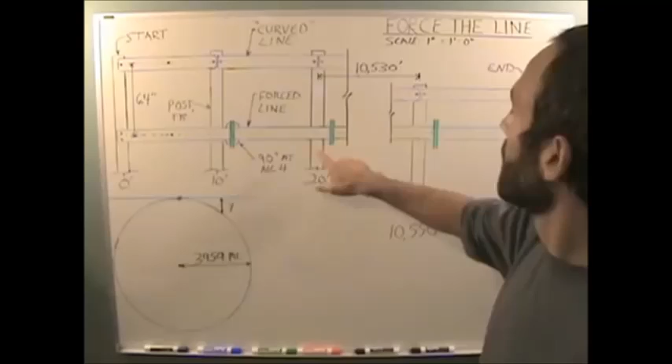So here's what we do. We set posts over a 2-mile stretch of land. What I've got here are my posts, okay? 10 feet on center. Here's your first post, second post at 10 feet, third post at 20 feet, all the way down to 2 miles away. Here's your last post at 10,560 feet, or 2 miles, and your second to last post at 10,550 feet, okay? I've got my break line in here to show that the distance between these 2 posts is 10,530 feet. You see what I've drawn here, okay?

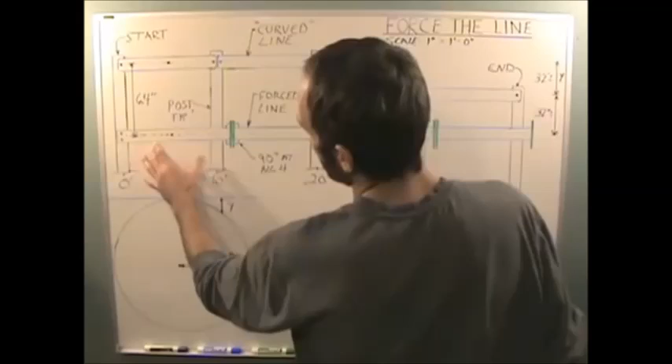Now the idea is, everything is based off the first 2 posts. What we do, we set the posts in a straight line. Very, very easy to do. Contractors can definitely do this.

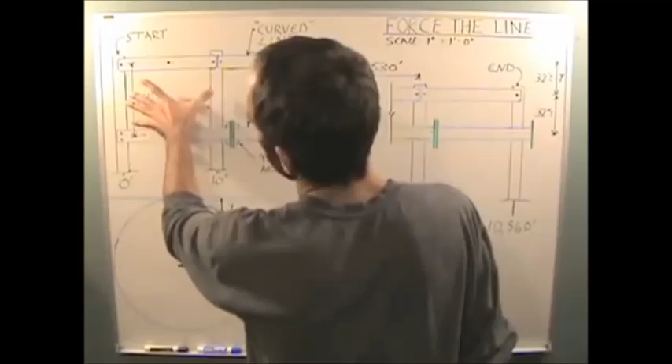And then between the very first 2 posts, we construct a beam between the 2 and level that beam. We level this beam. Make it level. This is typically how beams are constructed. You always level them out, unless there's a roof slope or something. But for a floor beam or something, you would always level it.

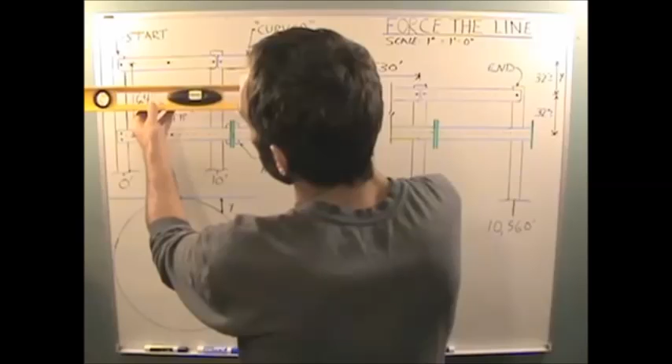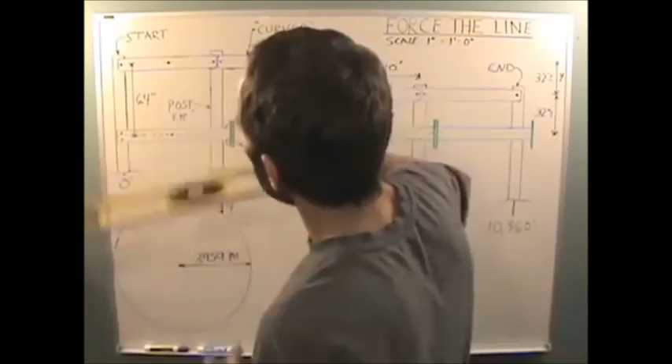Anyway, so this point right here is this point on the Earth, if we live on a convex sphere, okay? Meaning that when this beam is leveled, there is an imaginary line perpendicular to the center of gravity of the Earth, extending this to the center of the Earth. And then we do the same thing all the way to the end.

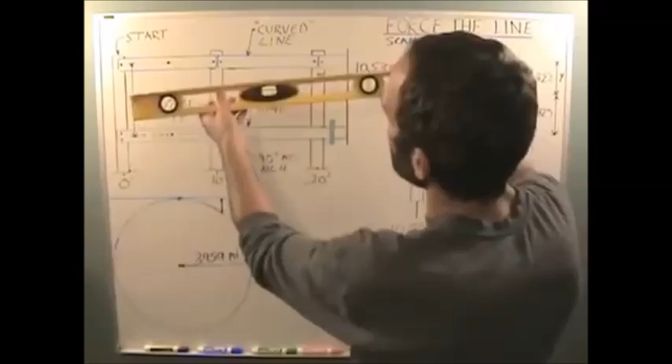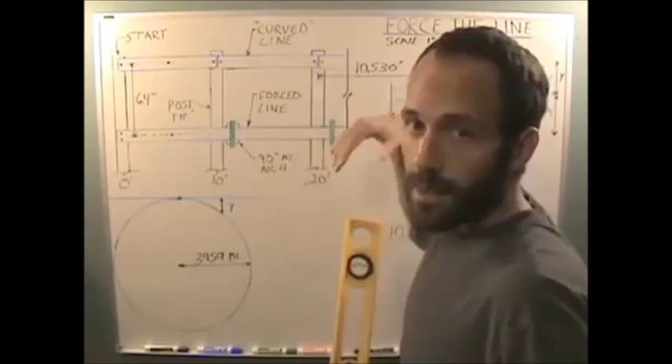We level each one of these beams all the way for 2 miles, okay? So every time you level one of these beams, it should be extending, it should be perpendicular to a line extending to the center of gravity of the Earth. So over 2 miles, those beams will actually follow the curve. They have to. If a level works, the only way it can really work on a sphere is if it works with the center of gravity.

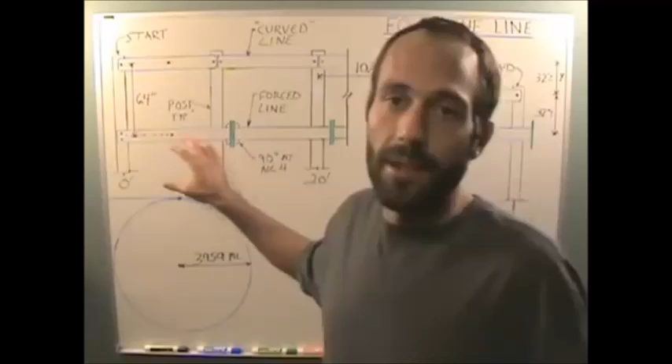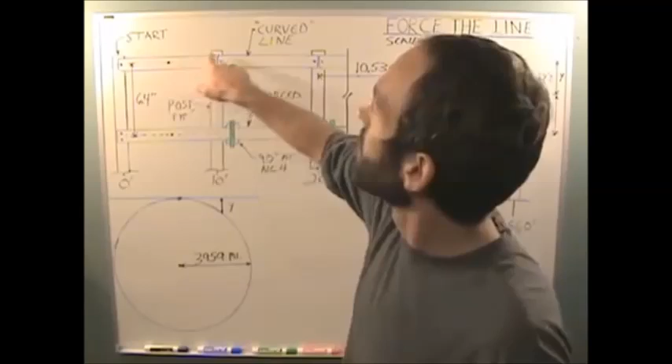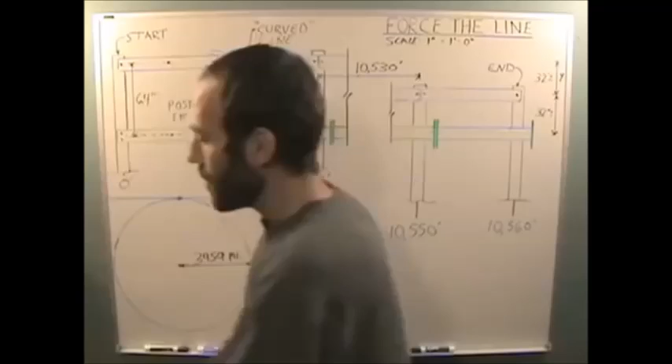Okay? Then, what we do is we use a rectilineator type device below it to force the line. This very first beam we construct right here is perfectly parallel, or as close as we can get to perfectly parallel to this beam. It's leveled too. We level that beam, okay? But then for all of the rest of the beams on the forced line, as I'm calling it, we use a connection here. It forces this beam, it forces a right angle connection to the first beam, okay?

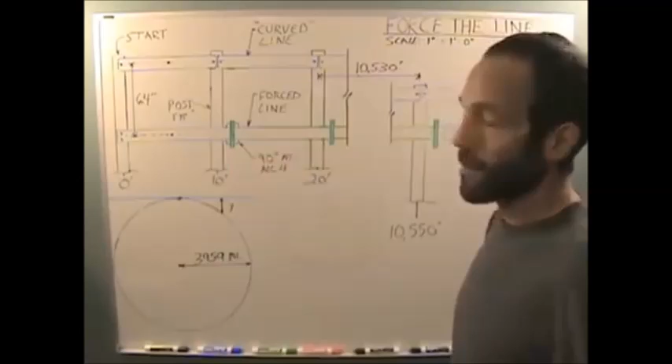So, say this is our first beam, and it's leveled, okay? The next beam that comes in, we use precision machine work, or like a CNC machine or something similar, to create a connection that forces a right angle connection to that first beam. So now, this second beam is not actually level. You wouldn't be able to tell from the naked eye, and if you put a level on it, it would probably still show that it's level because our levels are not that accurate. But it will stay in line with this beam.

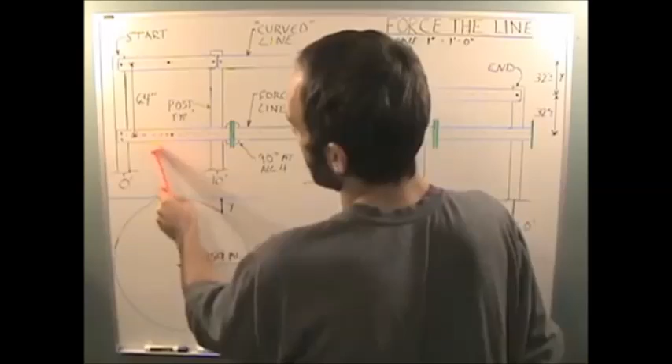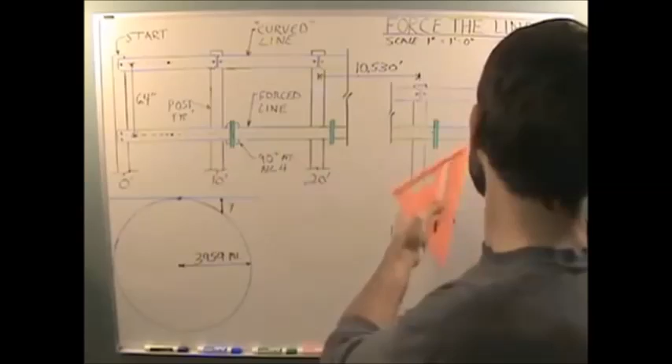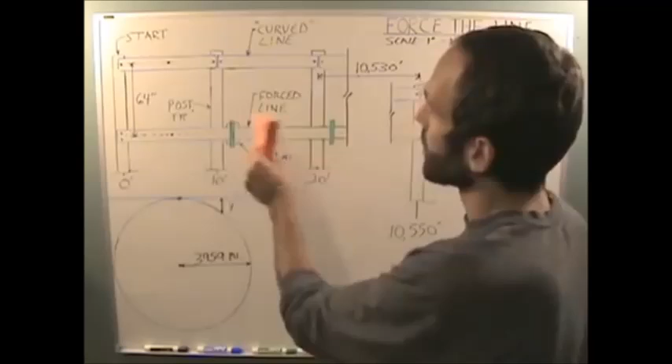And we do that all the way down to the end. Now, we can just use a rectilineator type device. We don't have to build these beams. We don't need 1,057 of these beams on the bottom, because they're going to be expensive to make a right angle connection like this. You see I've got 90 degrees at all 4 corners. We can just leapfrog it and just mark the columns or the posts as we go until we get the line.

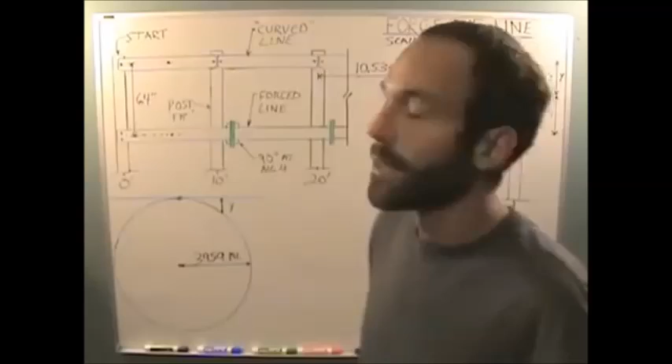Now, if the Earth is a sphere with a circumference of 25,000 miles, then over 2 miles, we should see from this point to this point a drop of roughly 32 inches. You can draw this in AutoCAD and prove it. This is what it has to be if the circumference of our world is 25,000 miles.

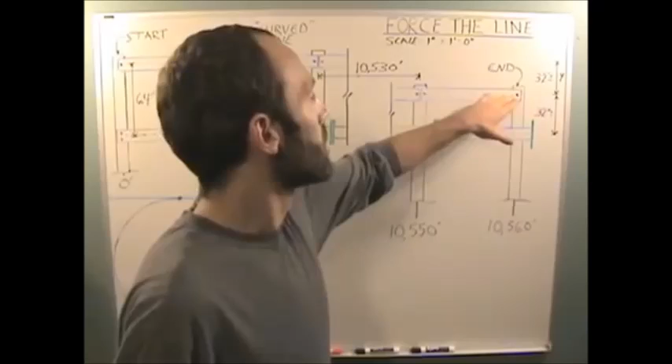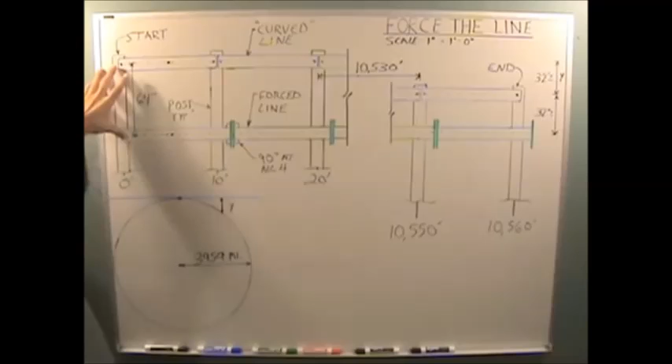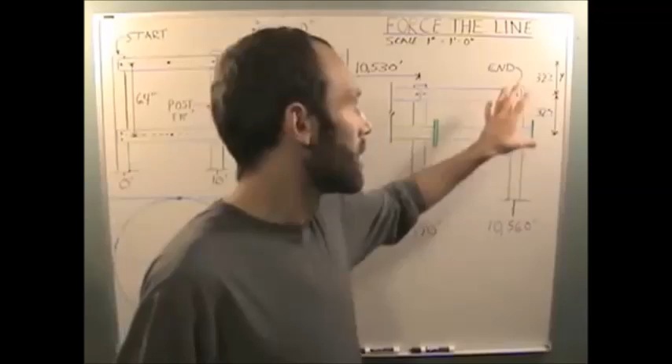Okay? So, we go all the way down to the end. And this last post, we should have 32 inches between these two lines. Because over here we started at 64 to give ourselves ample space. And at the end, there should be 32 inches, roughly. It's not going to be exact. There'll be some error, but there's enough drop that any small errors in plumbness of these columns and everything shouldn't affect it too much. This could be 30 inches, whatever.

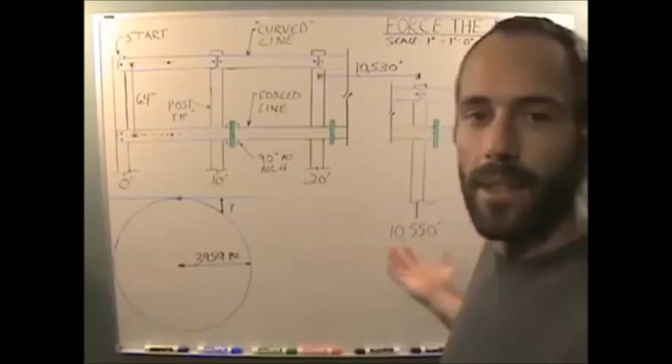Now, in the rectilineator experiment, they showed that the Earth curved up roughly 30 inches, that the concave sphere has the same circumference as the convex sphere. Now, that experiment was done 118 years ago, and nobody's done anything else like this since then. In fact, I find it funny that we don't have anything like this in the world. We have nothing that shows our curvature. Imagine how cool it would be to build something like this and leave it in place.

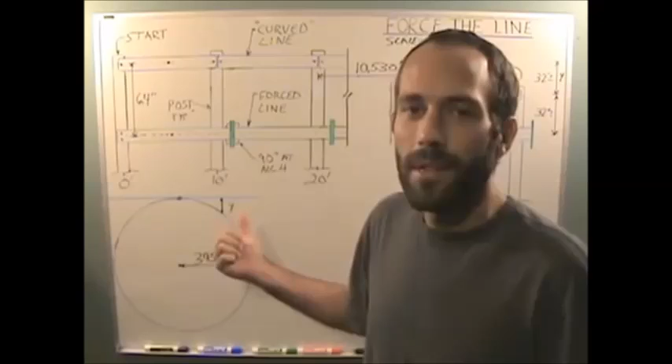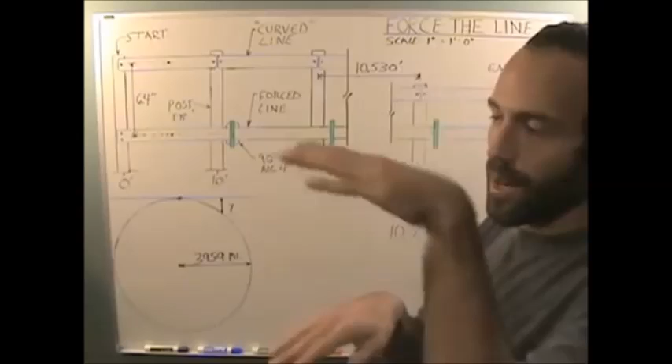Oklahoma, Nebraska, you guys want some tourism? Build this. Okay? Imagine driving in a dark sky area at night, and maybe they put some low lights, some lights that run down the line on this thing, and drive next to it, put a path next to it, or ride a bike or something. And as you're traveling, you can watch the curvature happen right before your eyes.

You can watch these two lines converge. They will both appear to be lines to you, but one of them's actually a line and the other one's curving.

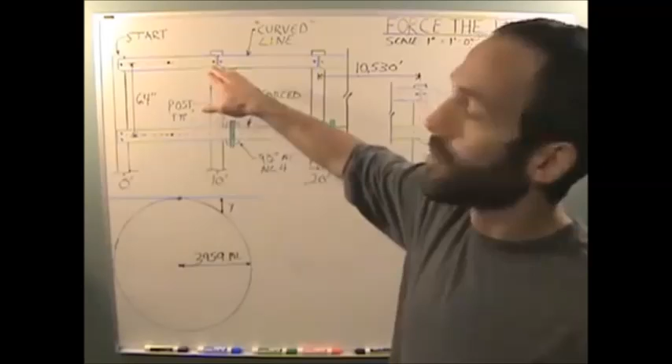Why don't we have this? Disney, I'm looking at you.

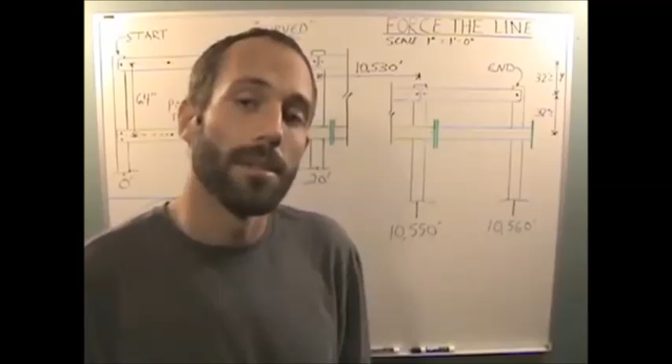Now you might argue, oh, nobody's going to spend money on that, it's just a waste of money. We have pictures from space that show it's a ball, there's no point. Well, those pictures from space cannot calculate this curvature. They cannot prove the curvature.

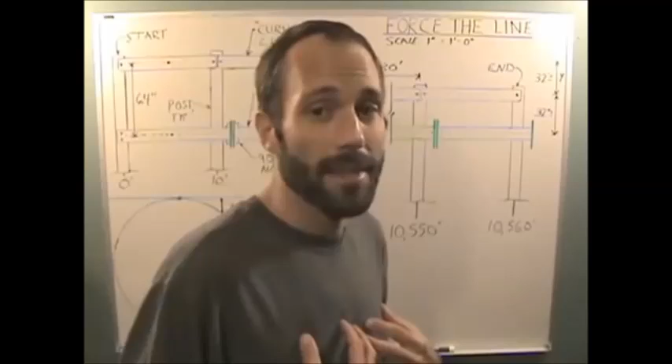On top of that, a few years ago, the United States federal government spent $800,000 studying the benefits of snail sex. Seriously. Now, I'm all for studying our world, but as a tax-paying citizen, I'm more interested in the curvature of my world than I am in snail sex.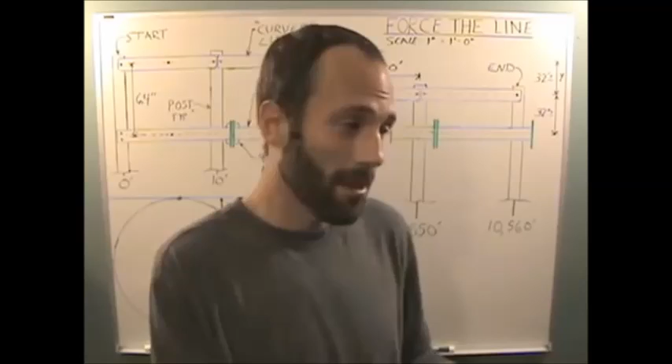Snails, I ride my bike a lot, I'm out in the woods a lot, I see snails every now and then. They look like they're doing okay. I don't think we need to study their sexual habits.

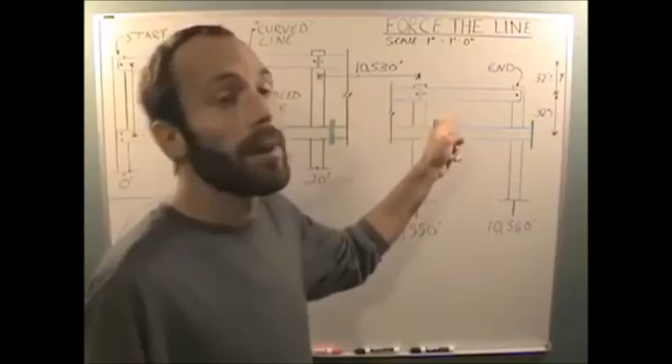Well, we can study their sexual habits after we're proven that we live on this ball. I want to see this happen so that I can rest easier at night and know that I'm not being lied to.

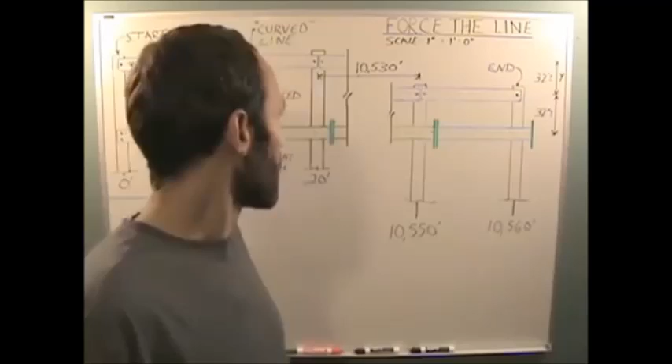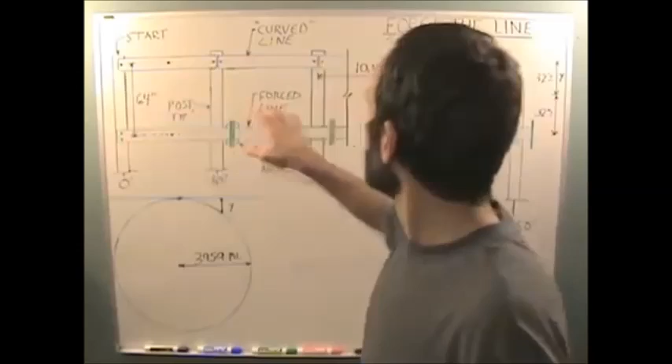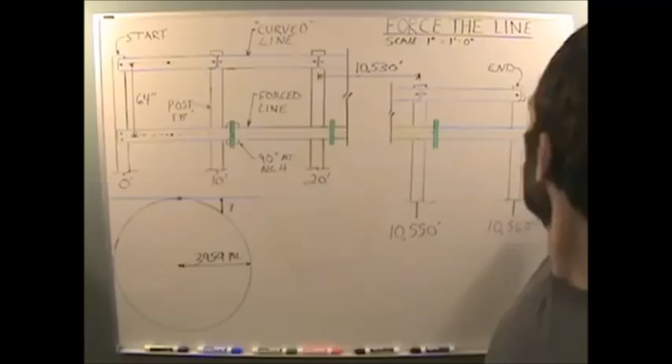So let's force the line. I ran some rough numbers. If we assume all these members are 10 feet long - forgetting the rectilineator, just the top line and the posts - and that they're all structural steel weighing 10 pounds per foot, and since this is outdoors, we want to hot dip galvanize all of these shapes. Hot dip galvanized structural steel runs about $3,000 per ton, a ton being 2,000 pounds. Adding all that up, we need 1,056 plus 1 posts, so 1,057 posts, and 1,056 beams. You get around $317,000. That's a lot less than what we spent on studying snail sex.

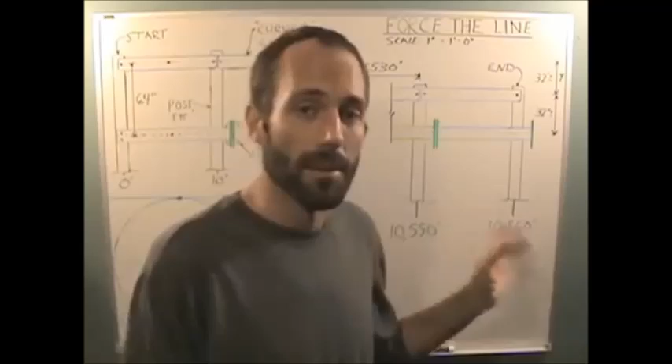And we could do this cheaper too if we put some serious engineering work into it. They don't need structural steel members weighing 10 pounds per foot - that's very conservative. We could make it better than that, but I'm just throwing some numbers out there. We also have to build this rectilineator type device, which could add another $100,000 because it's going to take some very precision machining to build it. But we can do it.

But who I'm really looking at is what about Disney? You guys have all that land south of Orlando. You've got Epcot Center with the Epcot ball that shows us it's a small world after all. Show us how small it is. Why don't we have this? I don't know.

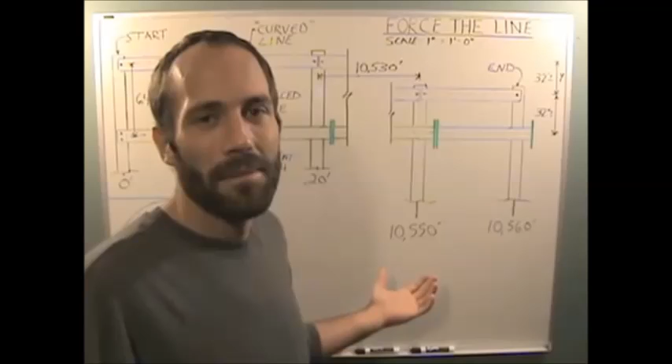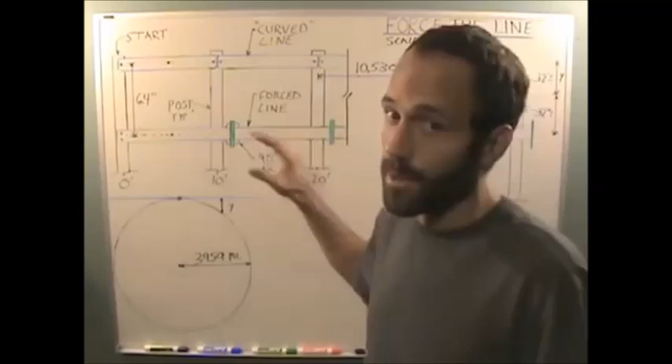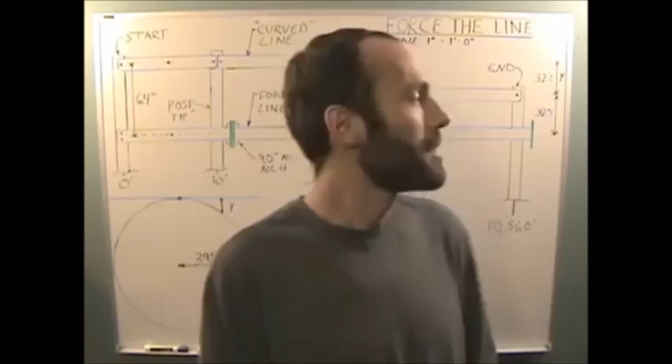Let's force the line. Let's stop arguing about what we're seeing and measure it mechanically. Let's find our curvature or no curvature. Imagine driving next to this and looking up at the universe and shaking your fist and saying, hey, we're not so small after all - that's only 32 inches over 2 miles. What? We ain't that small, right? Are we going to see this if we do this? I think this experiment would work.

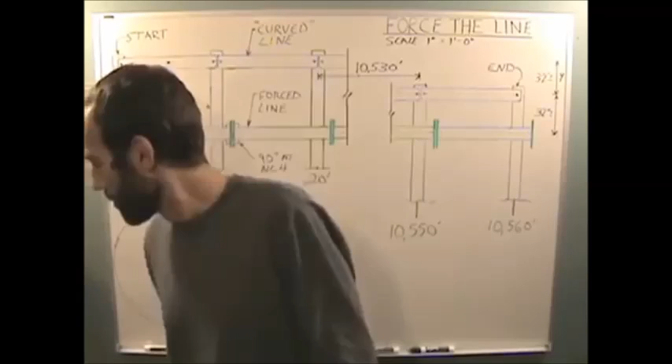I've thought about this a lot. I don't think there's any real flaw in this. Please tell me if you see a flaw in it. But I think this simple tool that we've been using for a very long time can show us the truth. Just a level - that's all we need, really.

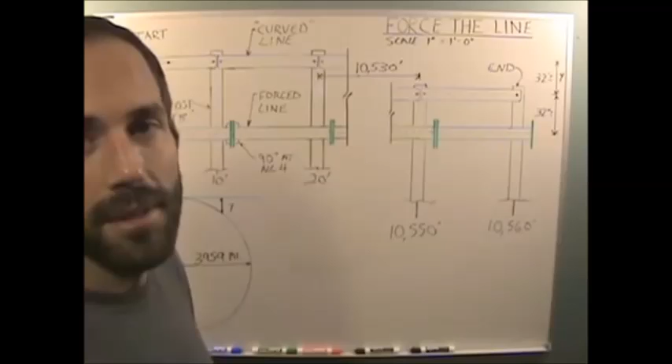And of course, some precision machining to make the rectilineator type device. But simplicity is what's important - a simple way to measure the curvature. And we can construct these things all over the world.

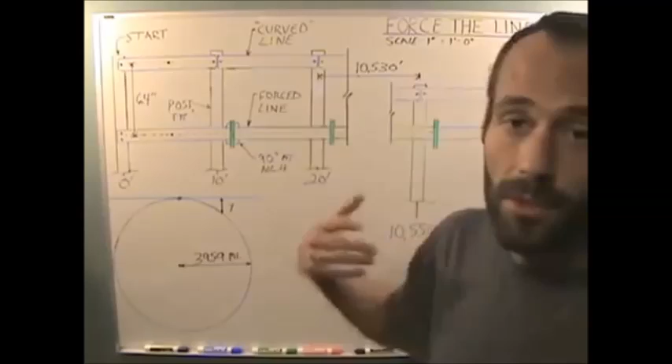Neil deGrasse Tyson is now telling us that we're not a perfect sphere as it appears from space, that we're an oblate spheroid, or more like a pear shape. Well, let's figure out how much of a pear we are. If we build these across flat surfaces of land - you could even do this in the mountains, you'd just need really long poles - but if we built these all over the world and got our numbers and started comparing them, really kept building them over and over so we get good at it and improve the accuracy of measurements, we could really get an idea of how much our world curves. We could model it better.

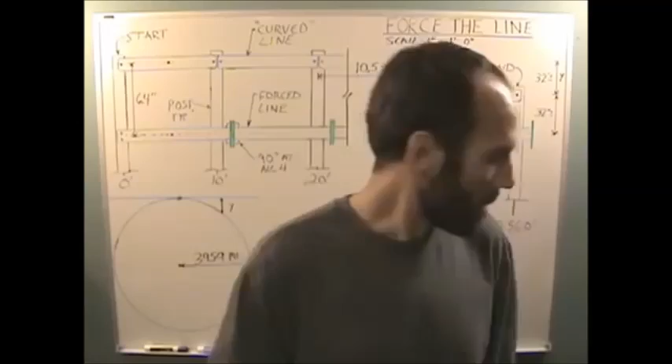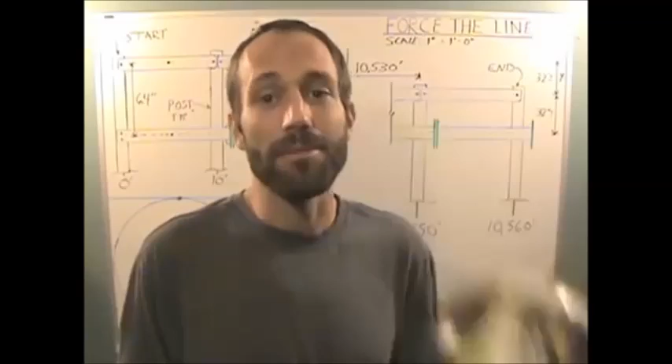Globes probably, if it's an oblate spheroid as we're told, wouldn't be a perfect sphere like this. We'd actually be able to show where it's not a perfect sphere, because we've measured it, we've done it - if this is it.

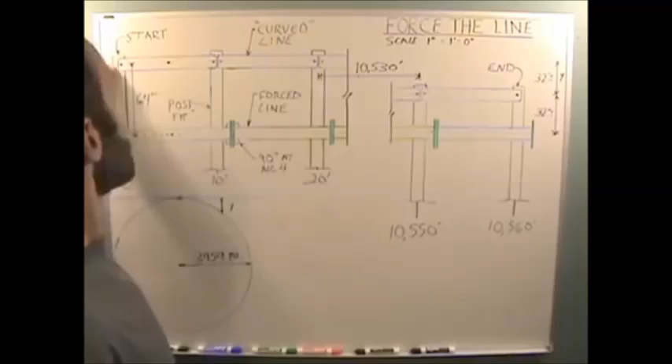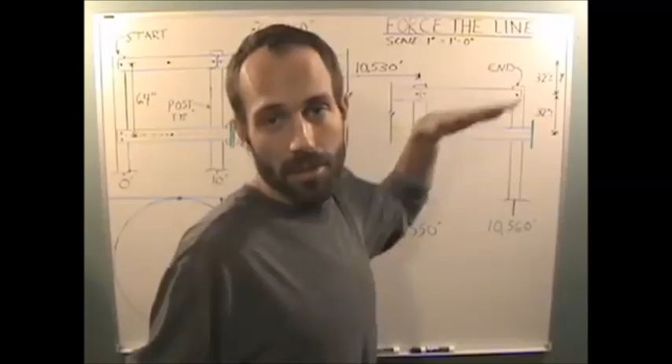Now, if the Earth is actually flat, then starting at 64 inches here, you would end with 64 inches here - there would be no drop, it would stay the same. If the Earth is concave, then you would actually end up with 64 inches plus 32 inches - the blue line would be up here somewhere, because it would show a curve up. Very simple. Let's do it.

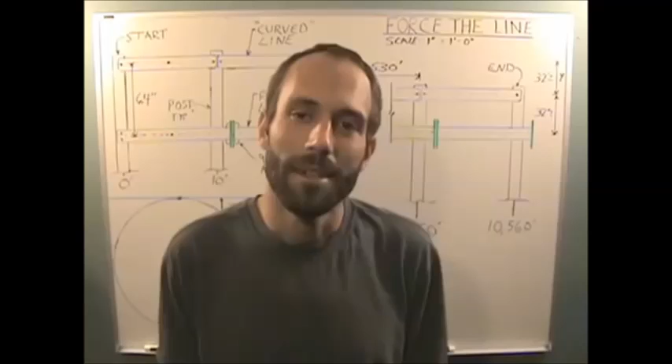These governments around the world are just taking money from us and doing all kinds of things. Whether the money used to study snail sex really went to that, I have my doubts. Who knows? I work in the public sector, and I've seen enormous amounts of embezzlement and waste of money - it's just incredible to me. So let's spend the money on something that would prove to us the world we live in, and I think this would actually bring humanity together pretty well.

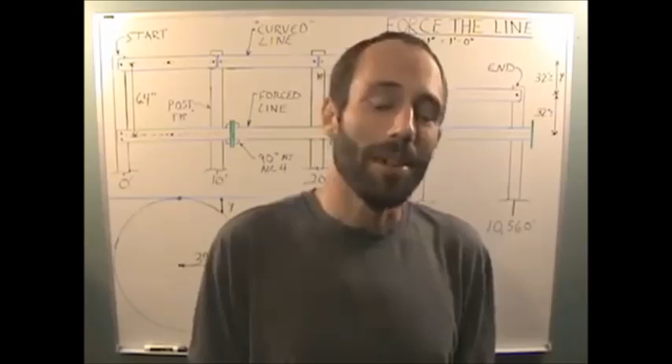Every country could show off its curve - you know, it curves this much in China, it curves this much here. How cool would that be? Disney, build this.